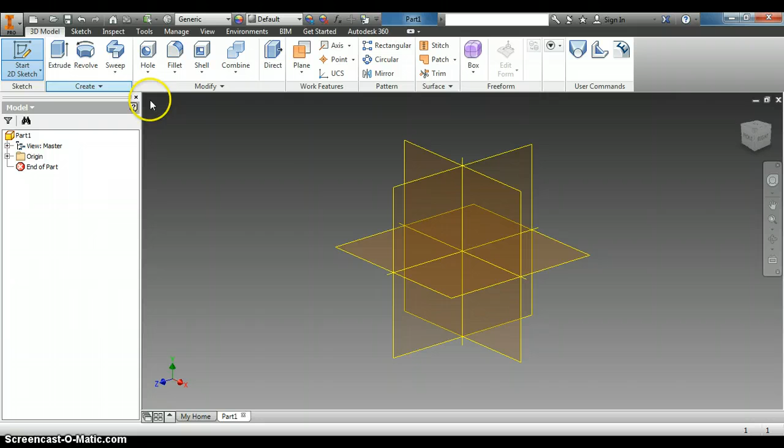Today's video is going to be about drawing the engine of the toy train that we've been working on here, and we're going to start with the base of that. I've created a new part, and we'll start with 2D sketch, and I'm going to click on this plane here. And so we'll start, and first thing I'm going to do is draw a rectangle.

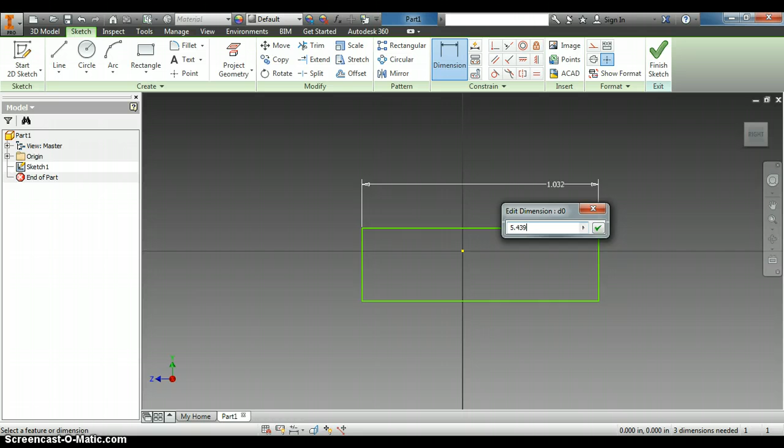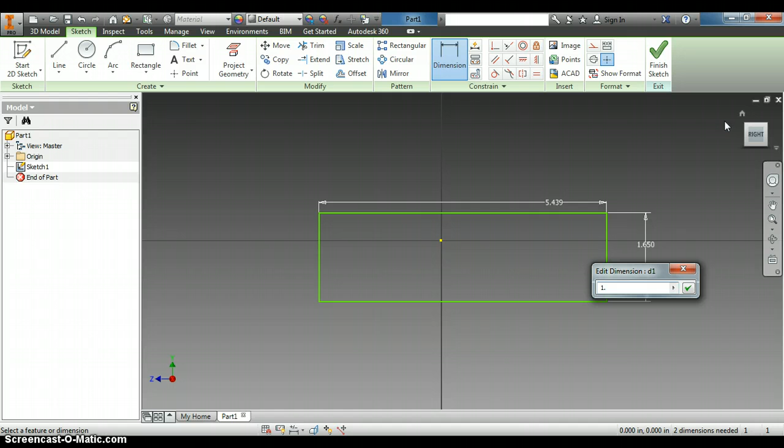And I'm going to dimension this, and this longer surface here is going to be 5 and 7/16, which is 5.439. Press enter. And we'll have to zoom out a little bit here. And then I'm going to dimension this side here, and the height of it is 1.25. Press enter.

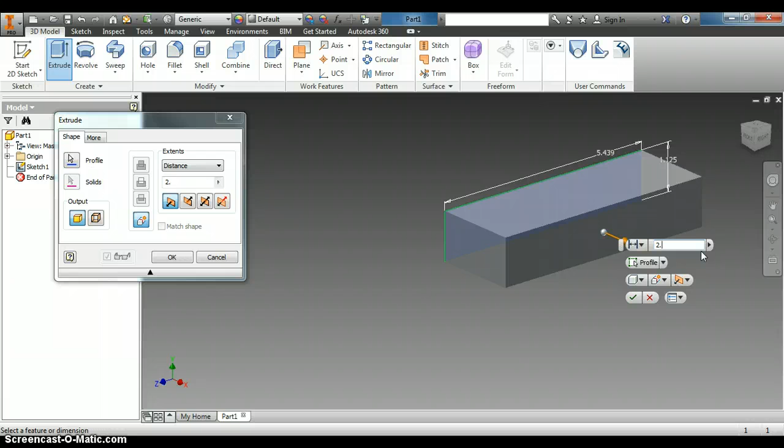And now we're ready to finish this and extrude it. So I'll extrude, and the distance on the extrude here is going to be 2.125 or 2 1/8. Press enter. And so there's the base of the part that we'll be drawing.

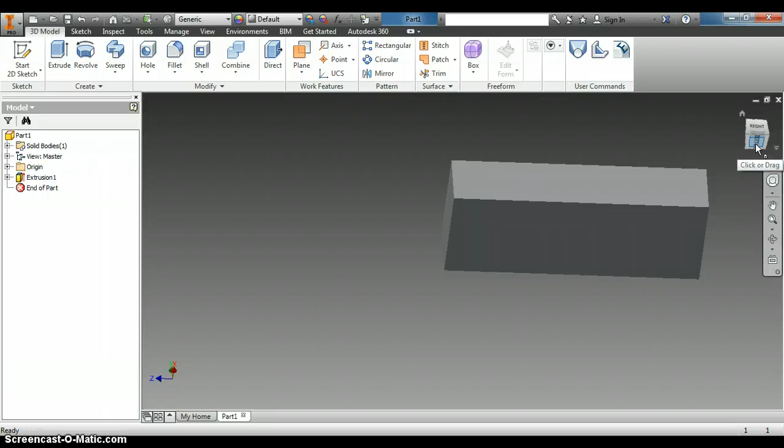Now I'm going to look at the bottom side, because we have to draw the hitch of it to hook up to the train car. So I'm going to start this on the bottom. You can see I have the bottom here. I can rotate that view around. And we can start a 2D sketch, and there we're ready to go. Now, first thing I'm going to do is kind of like what we did with the train cars.

I'm going to click on the circle, and I'm going to find this midpoint to kind of get me going here. And I'm going to draw this before I click again, or if you click, you can click on dimension. Before I click it, I'm going to type in 0.75 for 3/4 of an inch. And press enter.

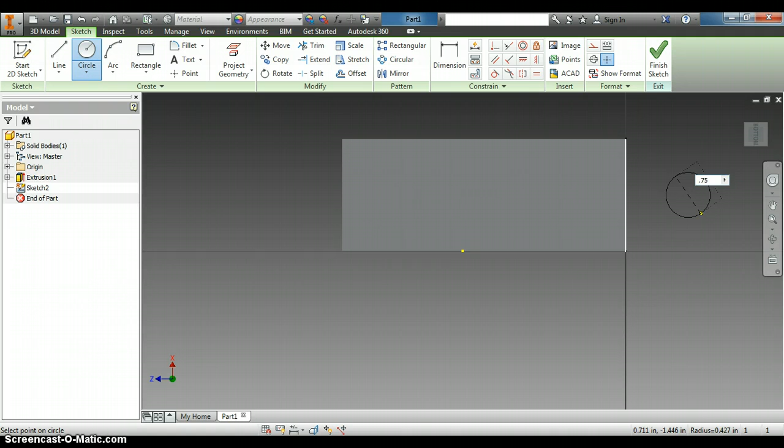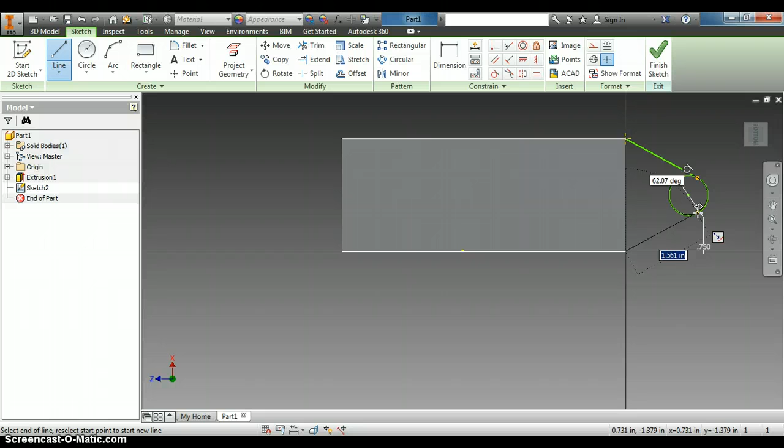And now I'm going to do like what we did with the train car. I'm going to click on the line, and starting in one of the corners, I'll start with this corner. I'll move along the circle until I see the tangent symbol pop up, which again is that circle with line attached to it. I'll click there. And then I'll click on the other corner and move along till I see the other tangent pop up right there. And then I want to trim this bottom half of this circle. So it's starting to come together now.

The next thing I want to do is dimension. Well, let's go ahead and finish this off. Click on the line. I'm going to click here and close that drawing. Right click and press escape. So now it's a solid object here. Now next thing we need to do with this guy is we need to tell how far it is away from the actual engine body itself.

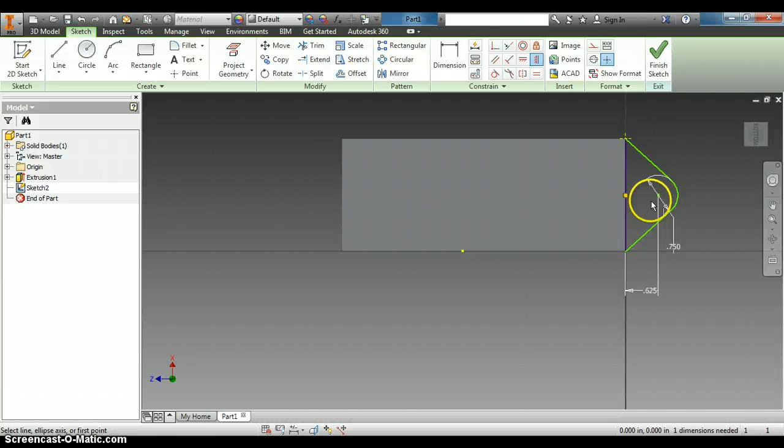So I'm going to click on dimension. I'm going to click on this edge and the center of that arc, come down and click, and that was 5/8 or 0.625. Press enter. And then last thing is to do a vertical constraint, center of that and the midpoint here, and that should constrain those.

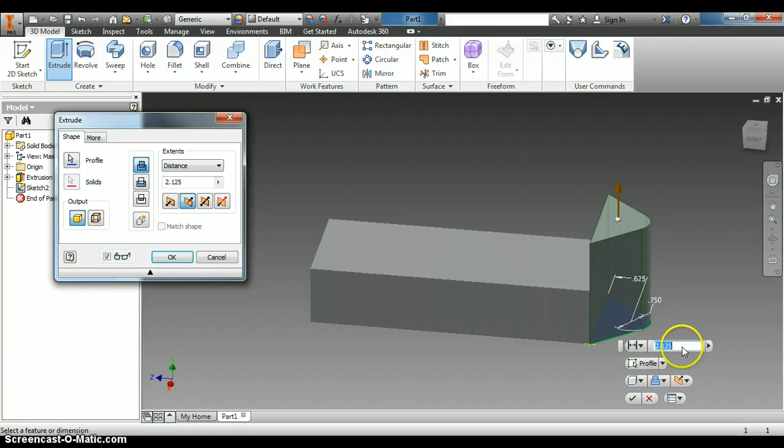Alright, let's go ahead and finish sketch, and I'm going to rotate around just a little bit. There we go. And I'm going to extrude, and I want this to come up this way, and so I'm going to flip the direction, and the one dimension I didn't get was, okay, so it's going to be 0.5. Oops. 0.5 here or there, and then hit the green check mark or press OK.

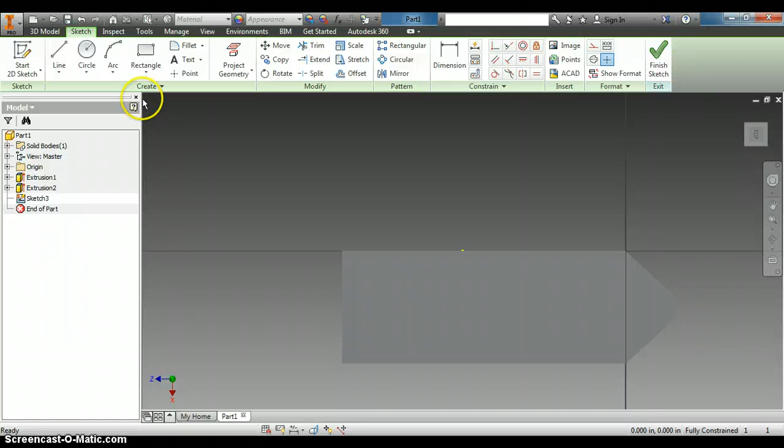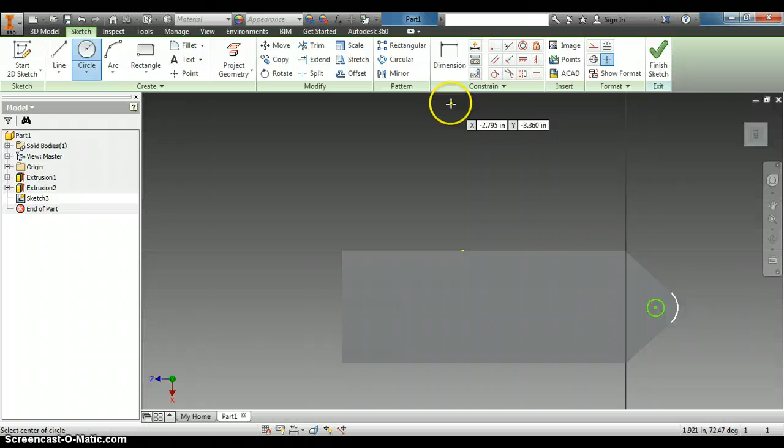And so that's that. Now there's a little peg that sticks up on top of this surface, so let's go 2D sketch. Let's click on that little hitch part, and let's draw a circle somewhere in there. And the circle here, this dimension is going to be 5/16 or 0.313. We'll press enter.

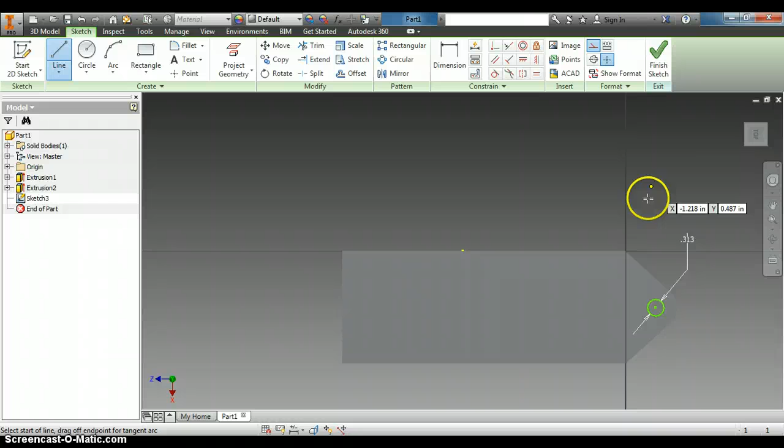And it is, click on dimension. Make sure you have dimensions, click on this edge to the center here. Okay, sorry. Let's create a line and a construction line. And so click on this edge and this edge. And now we'll hit dimension. Click here and here.

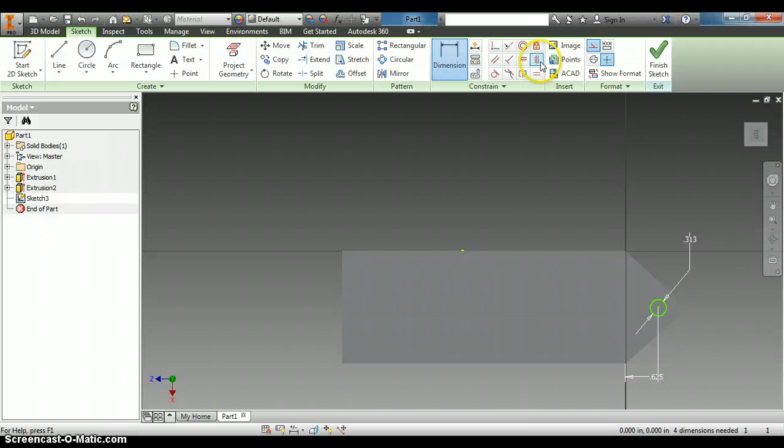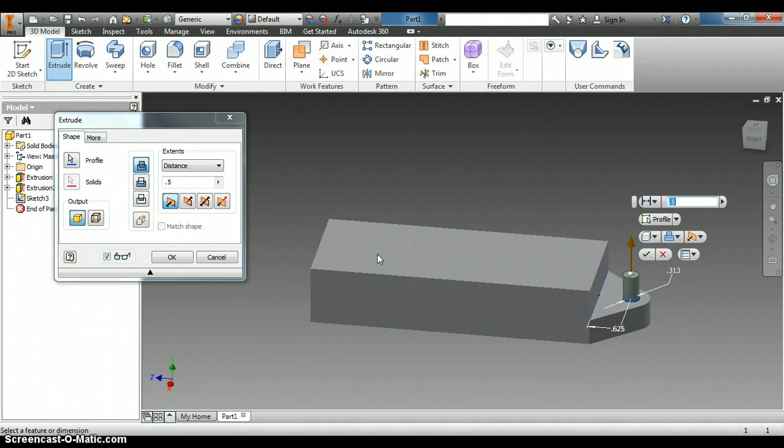And that was 5/8 or 0.625. Press enter. And then we'll do a vertical constraint. So the midpoint right there, and that, and so now it's lined up. So now we should be good. Finish sketch, and click on extrude. And the height of this thing is 1 inch. So 1. Press enter, and there's a little fillet on the top here.

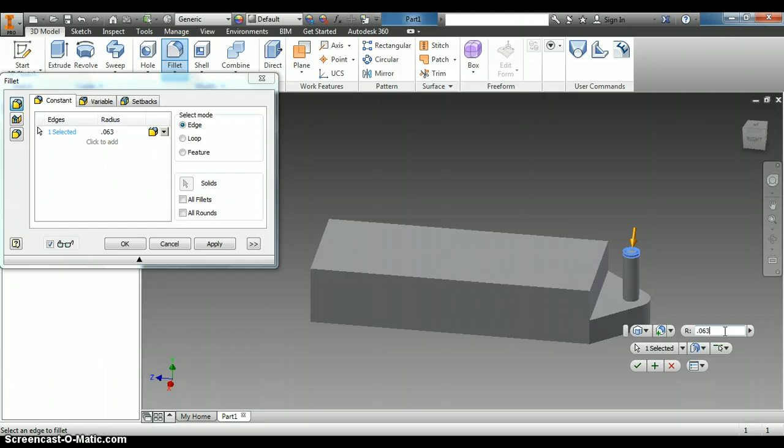That's a little much, so let's take it down to right here. Let's go 0.063 for 1/16 of an inch, and press enter. So just a little bit of a round on top of that. That's the basic shape here. Now let's add some holes for the axles. So let's go hole. Let me kind of focus this here.

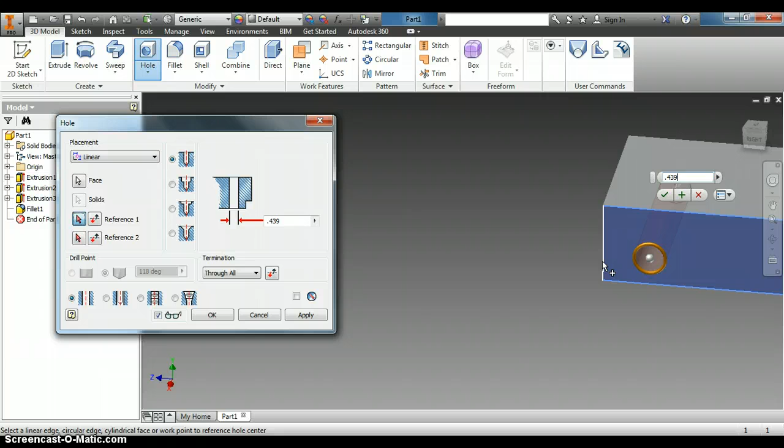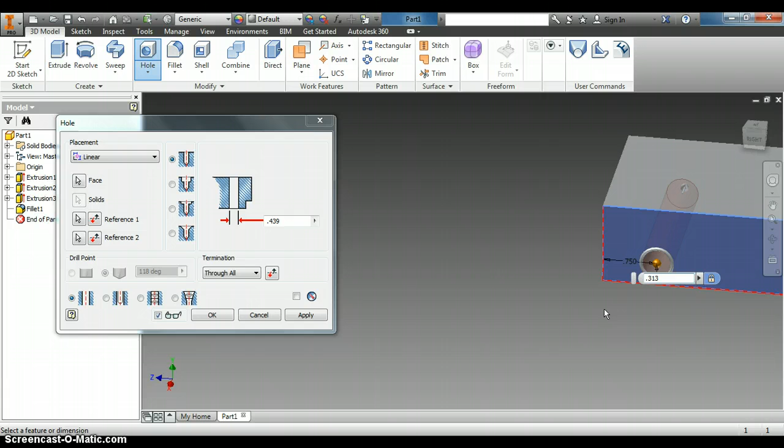So we're going to click here in this front hole. We'll click a hole, and it's going to be 7/16 or 0.439. And then we need to reference this, so we'll click on reference 1. And from the front here, it is 0.75. And then reference 2 here from the bottom is 5/16 or 0.313, and then you can press enter. So there's the first hole.

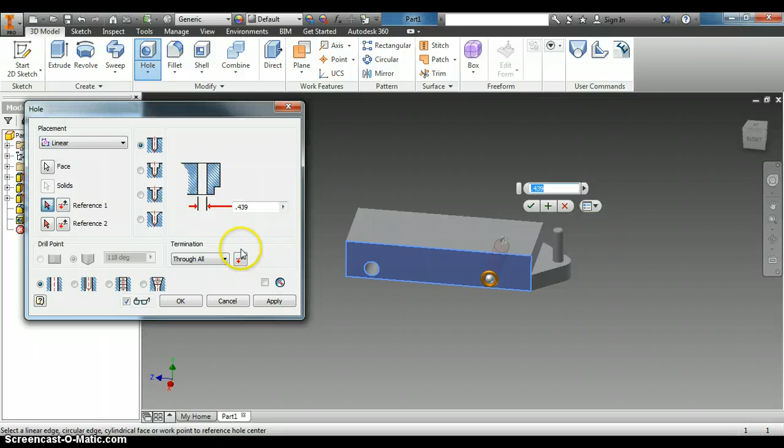And the second hole here, click on hole, and click back here, and same thing. The diameter of this thing is 7/16 or 0.439, which it has already done for us. We'll click on reference 1, and we'll start from this edge to the center, and that is 4.125 or 4 1/8.

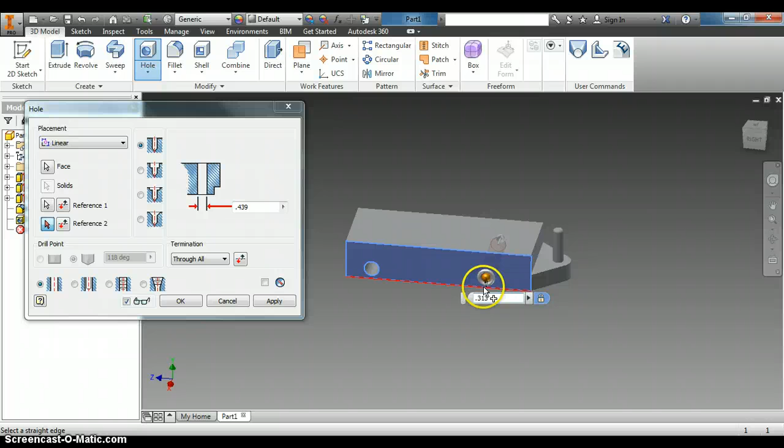And then reference 2, oh, I'm sorry. Yeah. This reference here will be, there we go. This reference will be 5/16 or 0.313, and then you can press enter. So 4 1/8 from the front, 4.125, and then 0.313 from the bottom there, and press OK.

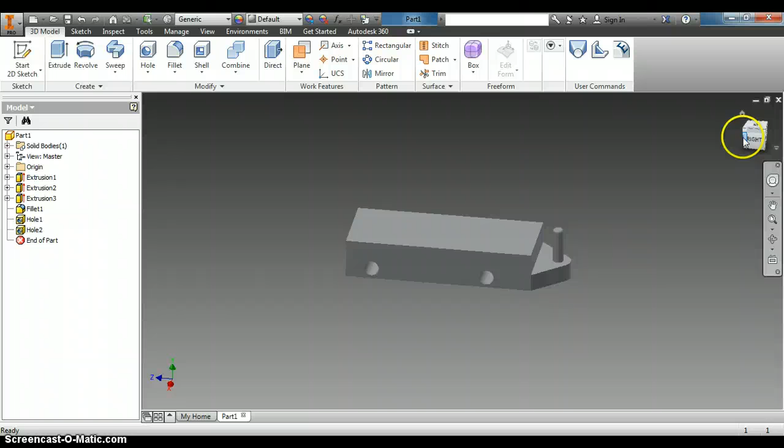Then the last thing, little feature to this base is there's a little chamfer in the front, and the chamfer appears to be about 5/16. So I'm going to rotate this guy around a little bit. So click on the little pull down menu here under the fillet, and click on chamfer.

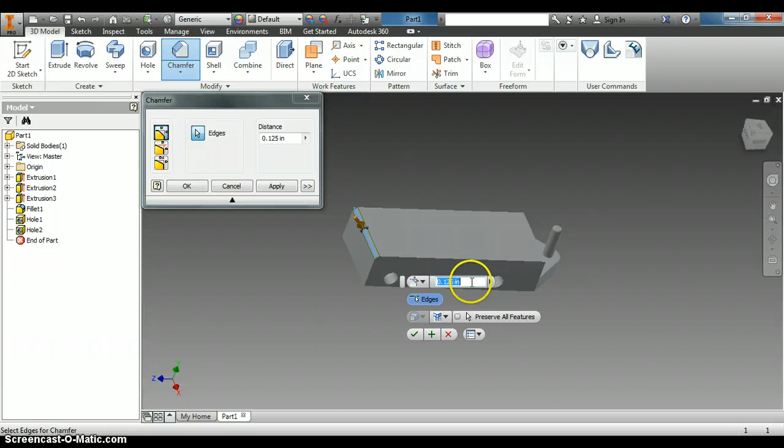And it wants to know what edge we're going to do, and we're going to do this one right here, and that is going to be 5/16 or 0.313, and press the check mark or hit enter, and there's a completed base of the train. Now we have to do the boiler, and that'll be our next video.